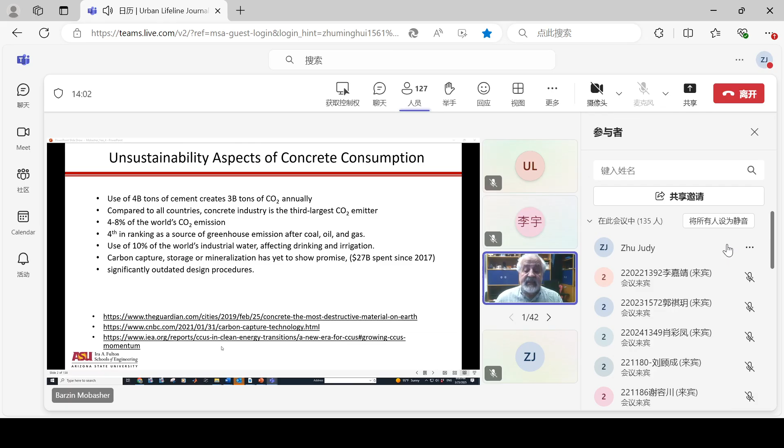So we need to look at the way we look at concrete and the way we design it. The second item I want to mention is that we are using significantly outdated design procedures. Some of these ideas presented here in these publications and news show that there is a real serious need to address that in concrete. And the question is, are we doing enough?

I believe there is a changing societal attitude toward use of concrete. Articles come out that say, for example, concrete is the most destructive material on earth. This gives us a bad rap, a bad idea, that this is not right, when everybody comes in and wants to just blast concrete as a fact that it's a problem, or the false promise of carbon capture as a climate solution, where oil companies take the carbon dioxide and pump it into the ground to get more oil out. But there is no guarantee that carbon dioxide is going to stay inside the ground.

So we need to look at our consumption. For example, China's cement use in 3 years was more than what the US used in the last 100 years. The growth of the Chinese economy, transportation, and infrastructure is really dependent on how well concrete has been used. But we really need to, and I want my colleagues there to take a lead on some of these ideas. If there is any way we can discuss these ideas, I would be grateful.

My third question is that about 60 to 75% of the concrete we use is loaded under flexure. Because its tensile strength is so low, it doesn't really carry much load. The magnitude of the load or stress that concrete carries in tension, as you all know, is quite small. So how do we develop efficient designs for concrete? Are we doing enough to develop efficient structural designs?

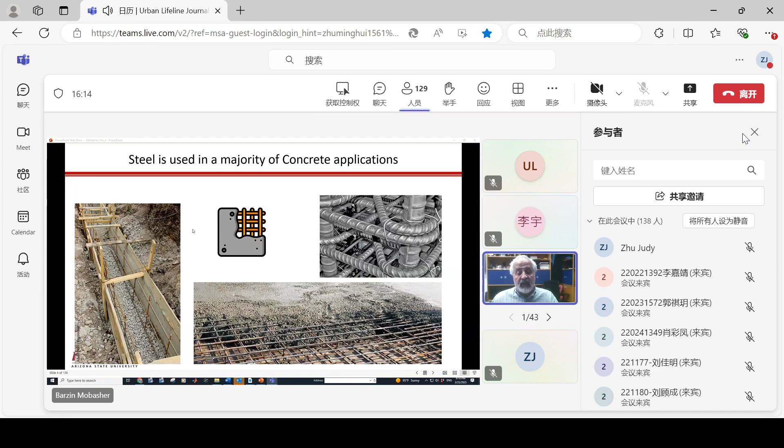Of course, we need to start looking at what I want to call a monopoly of steel, which is used as the only material for reinforcing concrete. Yes, we're using composites and everything, but the total amount of all the carbon fibers and alternatives out there is only about 100,000 tons, whereas with steel, we use about 2 billion tons throughout the world. That slide is shown here.

When you look at world production of steel in the past 70 years, basically from 1990 till today, the amount of steel that has been used has tripled. So no matter how much we recycle steel, our consumption is still much higher than our rate of recovery.

China produces 1 billion tons, half of the amount produced today. But 25% of all that, which is somewhere about 500 million tons, is only used in reinforcing concrete. So 25% of all of this number goes into concrete as reinforcement.

But we have all of the problems as far as corrosion, all of the problems as far as the labor costs and the amount of...

So if you want some conversion factors, for every cubic foot of concrete, we can convert it into SI, there is about 7.5 pounds of steel rebar that's used. So steel contributes as much carbon footprint to the concrete as the concrete itself, but nobody's talking about how are we going to find alternatives for steel.

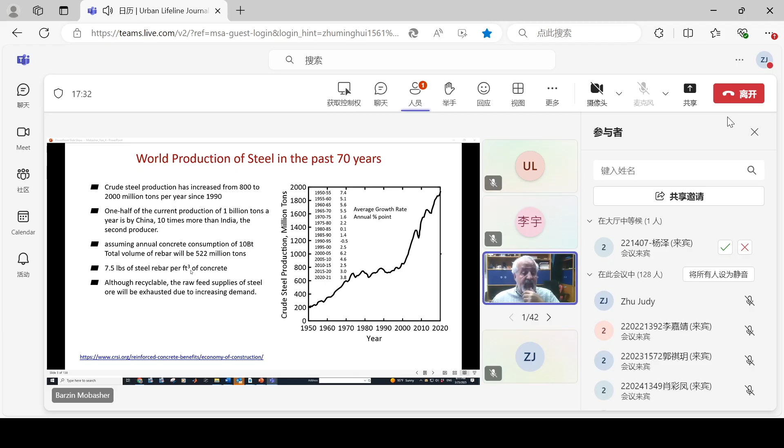And so that's basically the area of my work. So how do I reduce some of the steel that's used so much?

One of the things is the efficiency of concrete from several points of view. One is the stress to strength ratio for both tension and compression. Concrete is extremely good in compression, but it's awfully brittle in tension, which means we have a very low tensile capacity.

So we need to normalize the specific strength. We need to characterize the material property not based on its compression properties only, but also the tension properties. If we can improve the tension properties, we can definitely carry a lot more load, because tension failure is the dominant mode that is a showstopper that doesn't allow us to further use the amount of concrete.

So my argument is that we waste a lot of concrete because we allow it to crack in service, and then corrosion and everything comes.

So we need to look at specific strength per volume, and we should stop looking at compressive strength as a measure of how much CO2 per MPa we're putting out there, because we never get to reach that level of strength. So why are we putting so much more cement in order to increase the compressive strength, whereas we're ignoring the tensile strength? So what are the solutions that I have chosen throughout my career to address it?

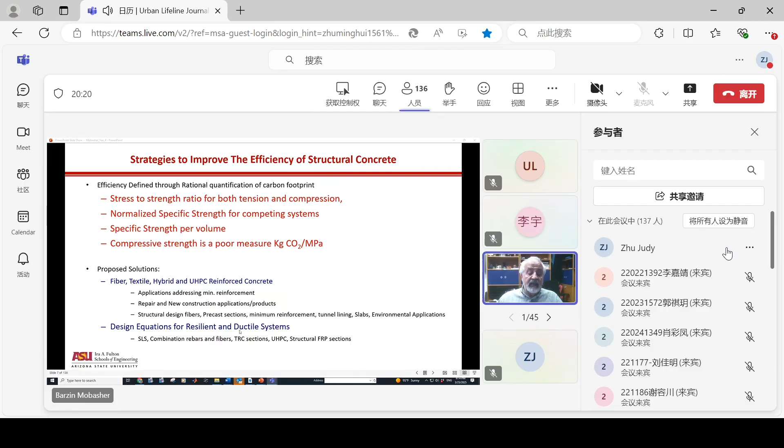The next step, which I want to get your attention to, is should we look at the way we design it? Can we develop design equations based on resilient and also ductile type systems for all of these materials?

So let's look at a little bit of a lesson in history. The bridge that you see there is basically 125 years old. It was made in France based on the fundamental principles of reinforced concrete. So the ideas have been developed for more than 120 years.

Model T cars, automobiles, were developed in 1908, and the first international flight, transatlantic flight passenger service, happened in 1939. So look at this airplane and look at the current day airplanes that we have. At the same year, 1939, that's when the design of reinforced concrete became standard.

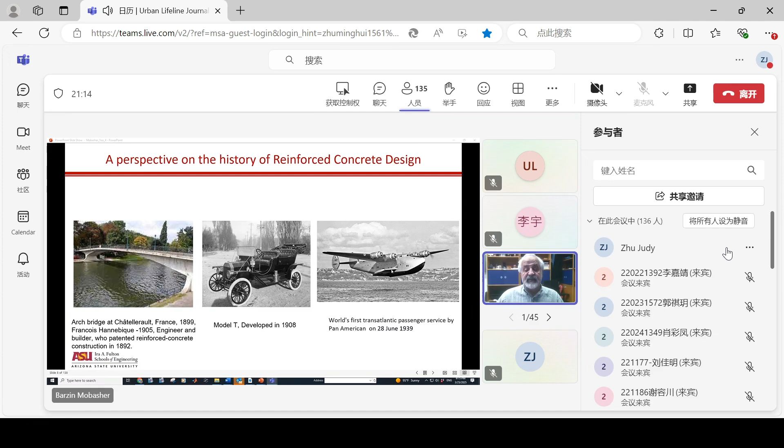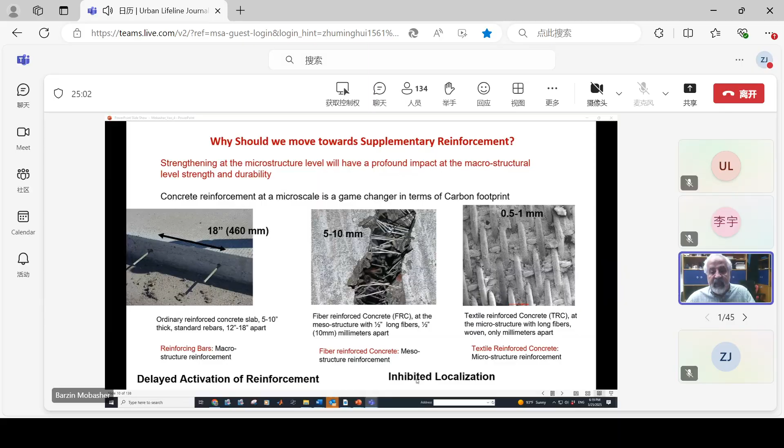But in the area of fibers and textiles, we have what we call an inhibited localization, meaning they are preventing localization from taking place, so the concrete is carrying a lot more load. I'll come back to this inhibitedness later on.

So what are the potential mechanisms that I can use to toughen the concrete? Everybody has done this, and we know it, but the question is how do we bring them into formulation? One of them is crack path tortuosity: allow the crack to go through many different paths, deflect the cracks, make it break apart and dissipate the energy, crack bridging, fiber pullout, yielding.

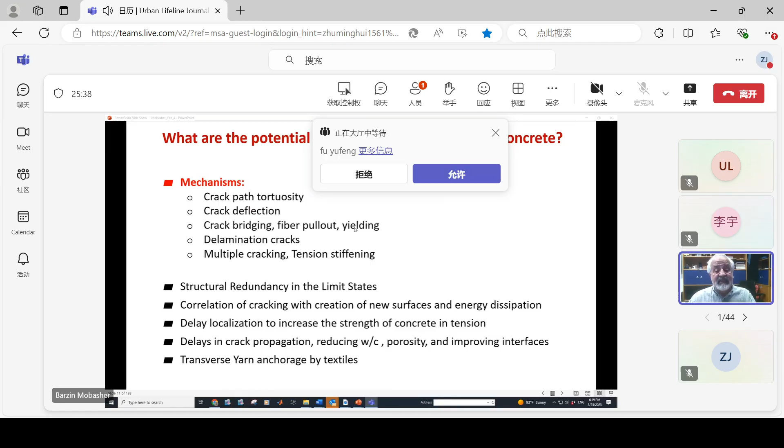All of these are negative energy—energy dissipation in the system. That's what we want. We want to spend so much energy, and that increases the toughness, meaning the energy required for growth of the crack is not available anymore. Delamination cracks are perfect. At the same time, multiple cracking, tension stiffening effects, and such all become present, and they take energy out of the system. That gives our structure redundancy.

We can go toward plastic limit states, and we can actually do correlation calculations of how much more energy is needed to create all these new surfaces, to create all of this energy dissipation. That's how we can increase the strength of concrete in tension by doing so.

Some examples: if you have a small crack before it has localized, of size 2A, if it intersects a certain number of fibers, the only way you can deliver energy to the tip of the crack is by opening of the crack. But if the fibers are bridging it, they don't allow these cracks to join each other, and it delays. Then when you go into debonding, you have to slide these debonding zones, and that dissipates energy. The sliding and opening makes it extremely difficult to deliver energy to this point where it's being dissipated.

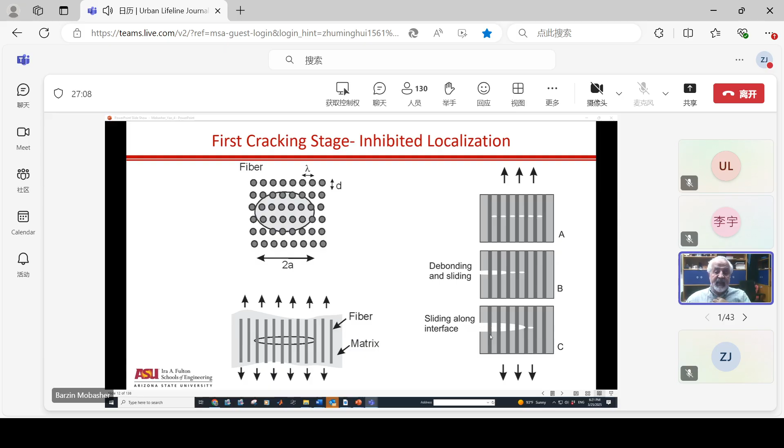So this is what I call inhibited localization. Another way we can look at it: if a microcrack grows large enough to hit a fiber, it gets diverted, goes through a delamination crack, then goes around. That delamination crack becomes a tunneling crack, which propagates up and down. This means you now have six crack tips wanting the energy. Some of the items I've written here, if you look at the slides later, you can see these are all mechanisms we can benefit from.

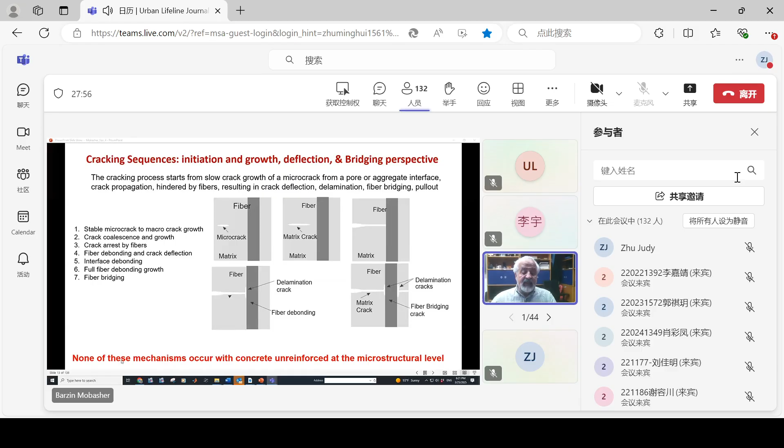This is good if you have fibers in there, if we look at the microstructure from a material science point of view. None of these mechanisms occur with concrete if it's unreinforced at the microstructural level, because for this initial microcrack to propagate, if there's no barrier along the path, it's just going to have all the energy to go through, since the surface energy is so small for the growth of the crack. It's these nonlinear terms that generate and dissipate the energy that gives us the added strength.

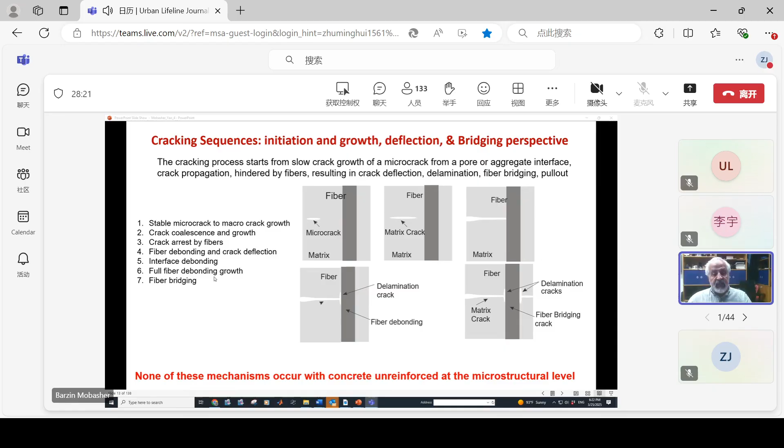So this allows us to play with a system where we make composite laminates with different orientations of continuous fibers. This is the area of textiles that I will talk about. When you look at the microstructure internally, we see all of these microcracks that have formed.

We can also try to develop a sequential system where you have a fiber pull-out mechanism. You take the energy of that, put it back into the system, and calculate how much energy is required to grow this crack. Even when it grows, you ask how many more cracks like this I can put in there. So we get these parallel cracks. These account for doubling or tripling the strength in tension.

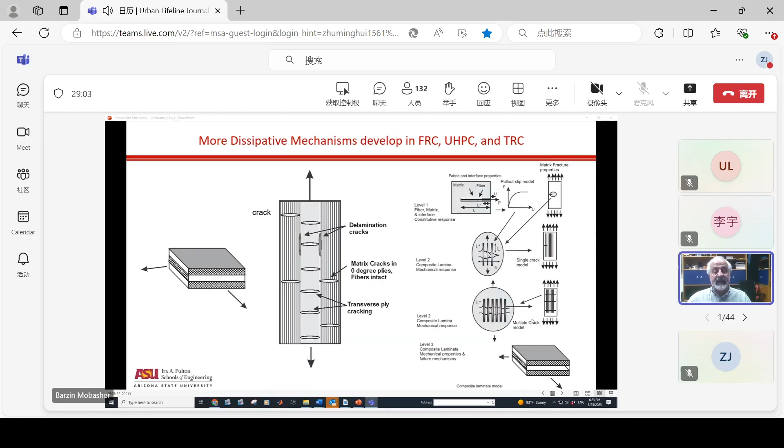If you double or triple the strength in tension, you can definitely reduce the amount of concrete needed to carry a certain amount of load. That becomes secondary, and we can calculate it.

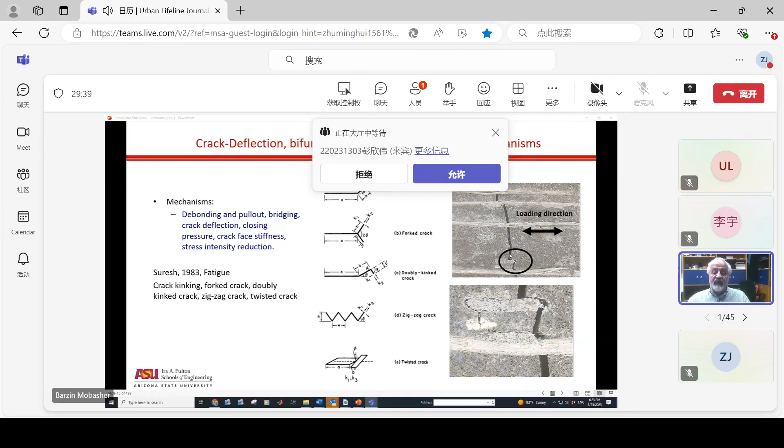Another part I showed you is how a crack gets bifurcated, gets deflected, and then travels. So this is basically all the delamination I was showing you in a picture. All of these parameters can be shown as mechanisms that form in the case of fatigue of metals, and that's how fatigue can be calculated in terms of how much damage you're allowing to take place inside the material.

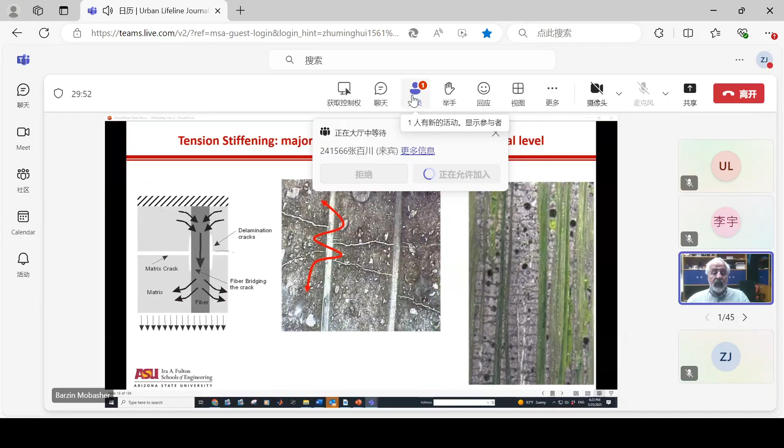You don't want a clean, fresh crack that's growing. You want to basically make it difficult. The best example of this would be continuous fibers. If you look at these microstructural pictures, you see how the load from the matrix goes as a bridge onto a fiber, travels across the crack, causes delamination, and then sheds away.

So technically speaking, any matrix you see here, although I have two sets of parallel cracks, the load jumps across here, jumps across here, jumps across here, and across here - just like the game kids play jumping over a small stream to not get wet. That's how the load is being transferred through this path, and we don't take that into account. We don't provide for this. Any way we can do this would allow us to generate this parallel cracking.

The spacing between these cracks is now on the order of 0.5 millimeters, so the crack width is kept smaller. The cracks cannot open up, so more cracks are forming, and so the bond issue becomes extremely important.

That takes us into this area of manipulating the microstructure to make textiles with AR glass, polyethylene glass, with weaving. Polymeric materials don't have a good bond system, but if we can do these geometrical changes, this shape we have, like textile manufacturing specific for our areas, they become extremely wonderful.

We don't have to actually do that. Also, if we can go to micropolypropylene type fibers, now we're increasing the surface area. So cement gets in there, it dissipates, it forms cementitious products, it changes the microstructure. So now you have an anchorage system automatically developed in our system.

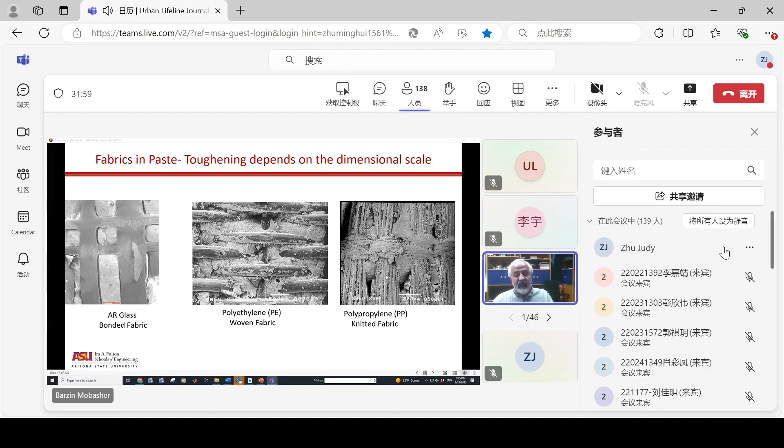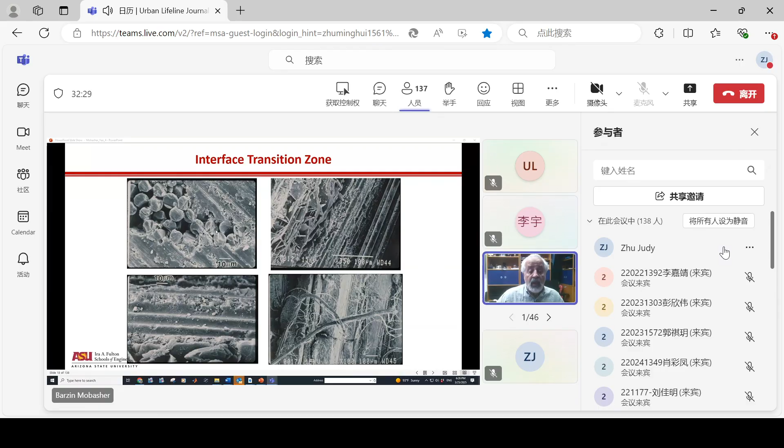This is the interface zone of a glass. If we can fill up this interface with hydration products, with calcium hydroxide, that gives us a certain degree of bond. And I want you to pay attention. We don't get full bond in these cases, and that's okay because these weak bonds give us delamination, cracking. So I don't want perfect bond actually, because perfect bond would mean that the crack has no propensity, has no direction to go up and down and in different directions.

I want damage. I want these to be directing the cracks. And that is obtained by these interlock mechanisms that we have. So we can look at polypropylene fiber or carbon fiber.

So in all of these, what I want is the pull out. I want energy dissipation. I am not really as much interested in changing the stiffness of the composite by carbon fibers. I could care less, because the cost of increasing the stiffness of the concrete is not that much important to me, because it's already stiff.

I just want to prevent the cracking. I want it, even if it cracks, to carry 30%, 50%, 60% of its tensile capacity. Let me put it another way. I want to get only 3 or 4 megapascal tensile strength out of concrete. If I can do that, I can guarantee that we can do the numbers and show that we can get billions of tons of carbon dioxide out of our environment. So that's a humanitarian thing that we have to do.

I don't want to make the strongest UHPC system. I just want to be able to activate these mechanisms. Now, what are these mechanisms? These are mechanisms of bridged cracks. And these bridge cracks can be represented by 3 parameters, and they are all related to each other.

One of them is bridging stress, how much stress is being transferred through here. Another one is crack length, how long has this crack propagated, what is the allowable crack, and finally, what is the crack opening profile. So these can be represented by sigma, U, and X, the 3 parameters. And you can define stress crack width relationship, stress distribution along the face of the crack, or crack opening as a function of the position.

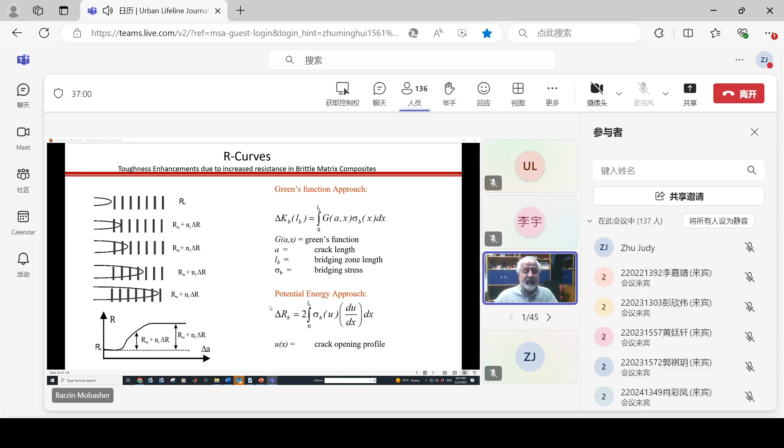And we can calculate how much toughening we get from a strain energy release rate calculation, or the R curve calculation. Both of these can be shown to be very similar, and these are methodologies used in the metals area for plasticity. We've borrowed these techniques from our colleagues, so this is not like my area. I'm just basically transmitting some of the information that I've learned throughout my years here.

So we developed a model about 35 years ago, and that basically tells me I have a condition. R curve can be thought of as a condition of stability. In other words, I have stable crack growth as shown by this green curve, and that is basically my strain energy release rate, shown as function G from fracture mechanics.

If I increase the load on the structure, the crack slowly grows by delta A until I reach a point where the slope of the two curves, G and R, are exactly the same. So initially the crack incrementally grows and stops, grows and stops. That's shown by R equals G, but the rate of resistance increases as the crack grows. So this is stable crack growth.

When I get into instability is when the slope of these two red and blue curves are equal to each other. So it's a very simple thing to do. I developed this with my colleague, Professor Chengsheng Ouyang, at Northwestern University when we were working together. And the solution that we gave was actually a solution to a differential equation.

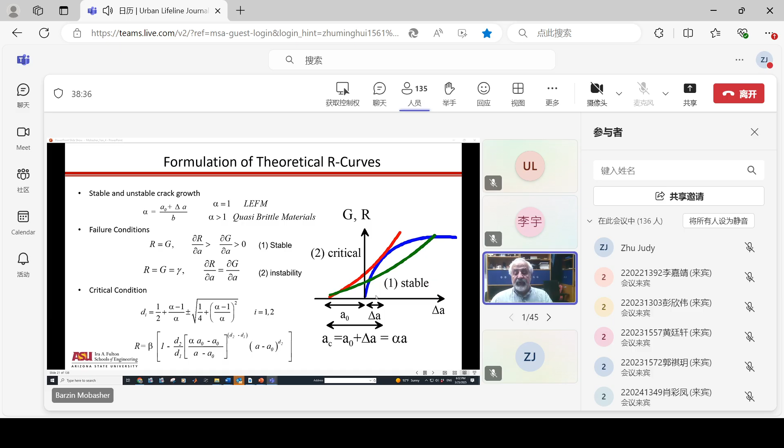The parameters are two parameters. One of them is alpha A, which is the amount of growth of the crack from the initial notch. The second parameter is the toughness of the material, which we can define as parameter beta. So with this two-parameter model, we can predict how much the crack grows and how much extra benefit we get. This method has been used to show the toughness increase when you put fibers into concrete.

And this is done by means of compliance calibration, which is a standard procedure now for measuring. So a good test for fracture measurement is this compliance calibration, where you get the R curves and you fit. And now you can say, well, this went from a level of 24 to 35 or so, and this is only using alumina microfibers. So small fibers increase the fracture toughness of the material.

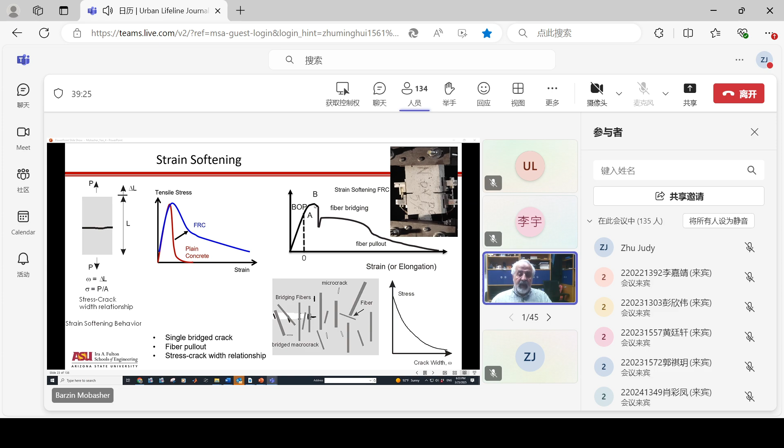Now, when we do that, we get basically the process that we call strain softening. That means that once I reach the peak, I don't have a fracture problem, I don't have a big huge sound. The FRC material basically carries more load as it's growing, and that has to do with fiber pullout because of the bridging fibers, which I mentioned to you.

And that can be represented by a stress crack width relationship, or crack width projection, and all of the parameters that I talked about before. But this basically puts us in a domain of strain softening.

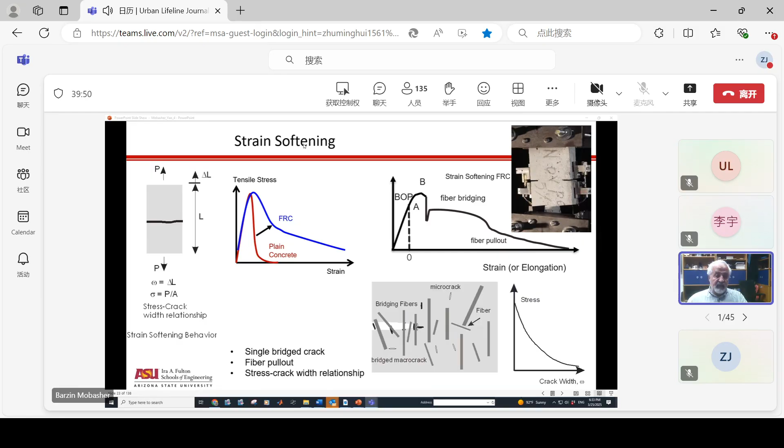If I go with a higher amount, like textiles or UHPC or such, now there is so much fiber in here that as soon as one crack forms, there is more energy available for growth of a second crack and a third crack or so. So I get this parallel microcrack system, and that would mean I go into a strain hardening response before I get into this softening.

Now I'm increasing the strength. Now I'm having a material whose tensile strength is almost twice as much, and my stress crack width relationship could be treated as a plastic type of curve. So this is actually really good, but it's costly.

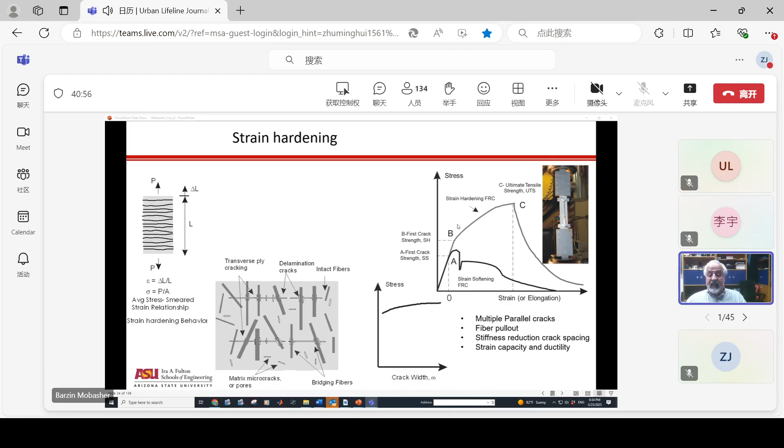Let's say the class of UHPC is defined by this model, whereas strain softening is for conventional standard material. But the criteria for strain hardening is that we must get some kind of parallel crack system. We should get fiber pullout that's controlled, and we can actually calculate the stiffness, and the stiffness reduction here can be used for our design.

And this takes us back to this whole issue that was developed by Kelly in the book he has, Strong Solids. This goes back to what we refer to as the ACK model, which was for brittle fiber, brittle matrix composites, which showed that if you have a system like that, from energy principles you can show that your stiffness decays until the continuous fibers carry the load.

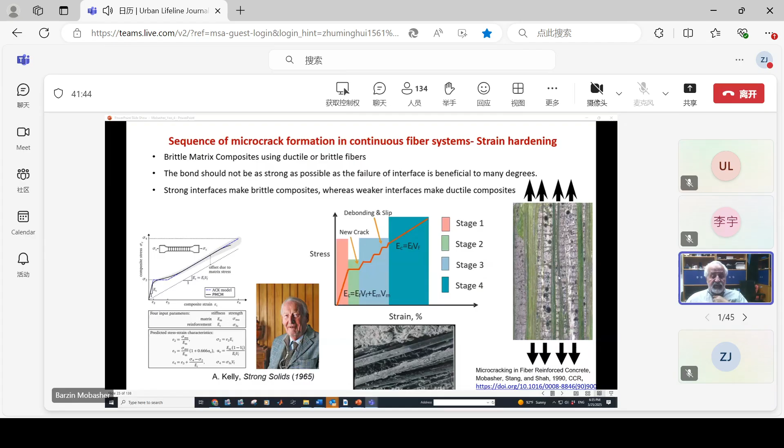We've shown that more than 30 years ago, cement-based materials can be made this way. This was done a long time ago, 1990, the paper came out 35 years ago. So we need to capitalize on this, and we need to show why these properties are this way.

For example, if we take the same material tested in tension versus tested in flexure. Here is a flexural specimen, and we put a mirror at 45 degrees so we can stand in front of the specimen and see the number of cracks that have formed. We see that we have more cracks in tension than in flexure, which has to do with the fact that the volume in flexure is much smaller.

We can use a Weibull approach to show that the representative volume in tension is much larger, so the probability of flaws is greater there. That's one way to explain it. But we have a big problem with converting data from tension to flexural tests.

And that is an important parameter for us to look at: why do our cement-based materials show a higher strength when we test them in flexure? Luckily, a lot of our failure designs, such as beams, are in the area of flexure. So that's where we look.

For example, these are some data we published a long time ago, where for the same specimen, tensile strength is about 5 megapascal, and the flexural strength is about 20 to 23. So if I'm designing something with this, I can design it with this calculation. You see that these are the same.

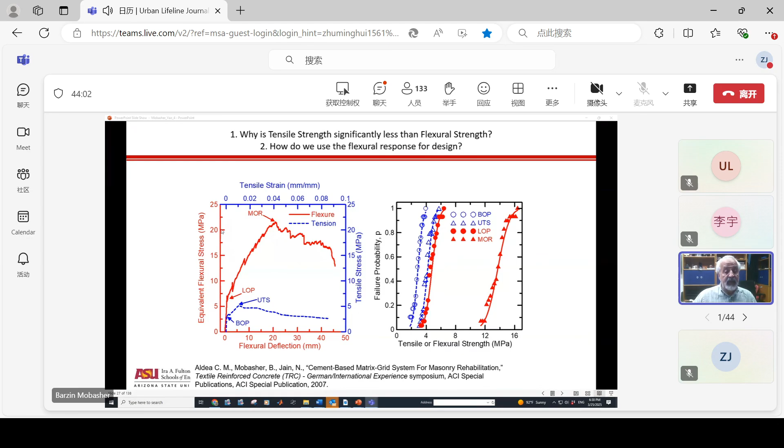So the challenge is how do I use a material that I know has a tensile strength of 5 megapascal, but design it so the apparent flexural strength is about 20. That's the key point in our work. Otherwise, we're going to have a lot of bridges that fail because somebody thought that just because they tested it in flexure and got 20 megapascal, they could apply 20 megapascal in tension also.

Another parameter we need to look at, when I talk about energy dissipation, is the manner in which we test. When we test materials, depending on whether we do closed loop control, deflection control, or load control, that affects the way the sample behaves. The best way of looking at it is to run a test that's CMOD controlled.

So we put a notch and load it, we get this blue curve. But the similar specimen, if tested under deflection control, when the load is applied under a constant deflection measured by the LVDT, we see the response suddenly drop at this point. This dashed area is the amount of energy that's stored in the specimen and given back to the test machine.

What I'm saying is that when you load a specimen in flexure, there is so much energy stored in it that the moment the crack initiates, if it doesn't have a lot of fiber, or only a very small amount, that stored energy is enough to cause fracture of the sample.

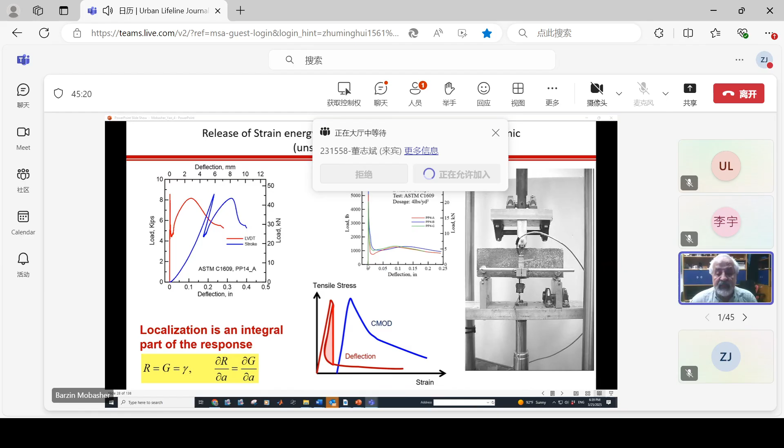So many times we run into a test like this: the sample goes up, hits a peak at a certain point, but then immediately the load drops. This is not the full response of the specimen. It's because the material is so stiff it cannot give the energy back to the test machine—it gives the energy back to the test sample instead.

That's what we refer to as snapback, meaning the load decreases as the deformation decreases, and then it starts picking up again. This is part of the problem showing that localization happens depending on how we're testing it. In other words, we just don't have enough fibers to give us that realistic strain softening effect.

So with all of this background, how do I design it? How do I design concrete? Basically, looking at it from a mechanics of materials point of view, I want to develop, using only concepts of mechanics of materials, a 1D flexural response for a composite system.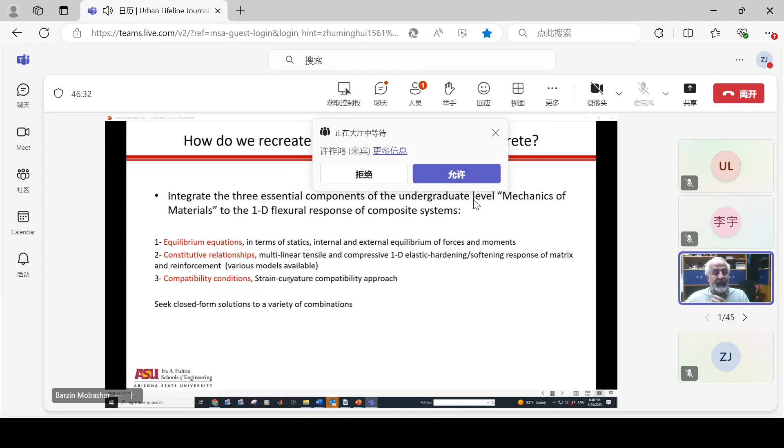If I do that, I need to respect 3 fundamental laws of mechanics. One is equilibrium equations—Newton's summation of forces equal to 0 in terms of statics, no problem. Second, constitutive relationships. Do not assume the material has a strength; it must have tensile and compressive responses in terms of stress strain. I need to use those stress strain relationships in my equilibrium equations to convert from strains to stresses. But the most important equation, often ignored, is the compatibility condition, basically plane sections remaining plane. That parameter is also important.

How do we integrate all these 3 to develop a 1D flexural response? What I want to do is solve the problems by means of closed form solutions, because if I set it up in closed form, anybody with a calculator can solve the problem. You don't even need to solve an equation, because the closed form solution gives you something you can just plug into Excel or anything like that.

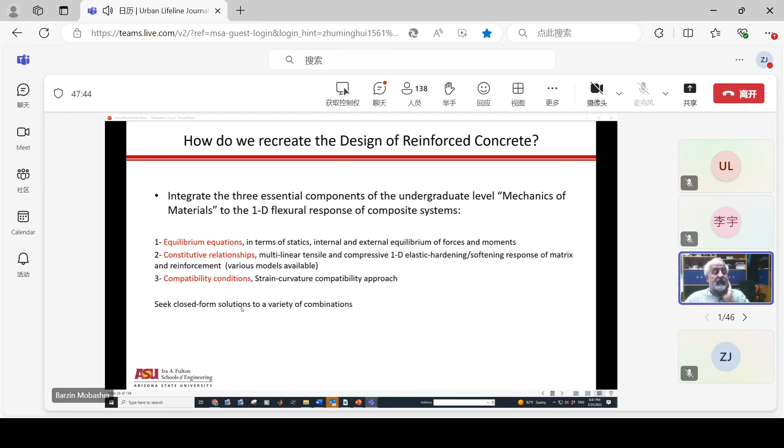So the question is, how can I get these solutions in closed form? To do that, we need to develop the stress strain diagram as a function of multilinear segments. Why multilinear? Because integrating a straight line is easy, and that's what I want to do. But I also want to use the minimum number of variables—defining two intrinsic properties: the cracking strain and the elastic modulus. The product of these two gives me the cracking strength, and everything else should be a function of it.

If I have a slope that's positive or negative, I represent it with parameter eta. If I have a constant stress in the post-peak response, I call it parameter mu—a number like 0.5 or 0.6. Eta can be 0.1, meaning only 10% of the strain is retained after cracking. Compression should also be expressed this way, so I define parameter omega as the ratio of compressive strength to tensile strength—maybe 10 or 12, meaning concrete is 10-12 times stronger in compression than tension. The same applies to steel: ES, the stiffness of steel, is n times E, or you can define parameter kappa, the strain capacity.

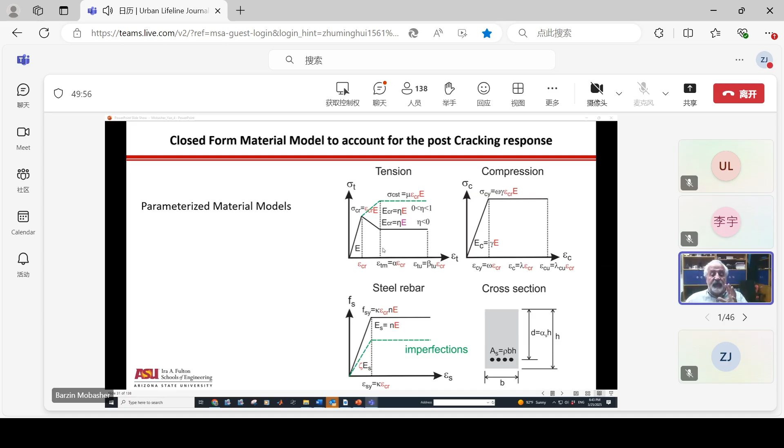Now I have very few variables that connect to each other because everything is specified. For this design, I first define my constitutive relationship—we've developed about 6 or 7 different models of this kind, each addressing a certain area: tension reinforcement, compression reinforcement, with different zones—4 pieces for tension giving 4 segments, 2 zones for compression, and 2 zones for steel. So I have a multiplication of 4 zones by 2 zones by 2 zones, a strain distribution from the strain compatibility condition, and I use the geometry of the specimen defined by B and H, plus the location of the rebar. All these are variables the designer can use, but they're all scalars—there's no dimensionality other than parameter E. Everything else is non-dimensional.

That means I can set up these equations, and now I need variables—2 variables. One is the maximum tensile strain, shown here as beta, and the other is parameter K, the neutral axis. If I know beta and K, depending on which zone beta falls into, I'd know exactly what my strain is in tension, but then I need the unknown K, which tells me what my strain distribution is.

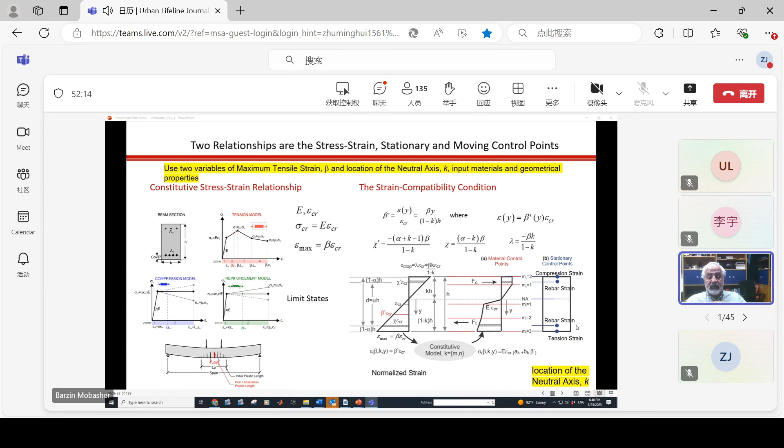Now I define also the points of interest, like, for example, compression, strain in concrete, rebar strain in compression, rebar strain in tension, and tension. So these are all points that basically can be solved. So with these 2 variables, what do you think I'm going to do?

I'm going to assume a strain, which means that beta is assumed. For that, I can get the strain distribution, stress delivery, how much stress is delivered, do the summation of the forces. Once I calculate K, I can go back in here and basically calculate the equation for moment and also the curvature. So basically, one has to go through these little triangles and rectangles and trapezoids and calculate their areas.

Which is nothing. It takes time, but if you're diligent, it's just basically very easily you can develop it. That would allow us to generate the moment curvature, which captures how one goes from one zone to the other zone. So transition from one zone to the other zone is shown by the cracking, as shown in this figure. And that's a bilinear case.

I know that these 4 numbers add up to each other and give 0, but I want to, at the end of the day, measure how much force is there in each one of these phases, because that would allow me to calculate the force efficiency factor as defined in here.

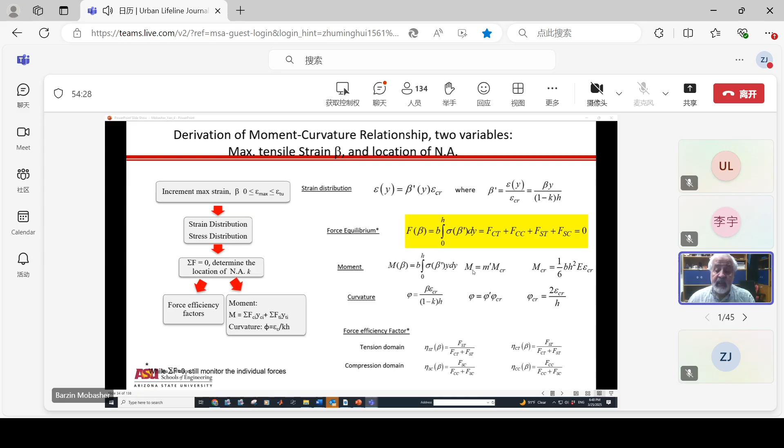Cracking moment is a function of geometry. So if I just simply change the size of this beam and just change m prime by the amount of steel content, I can easily calculate the moment curvature, and I would have the solution.

So the track that we could go, for example, for a specific case is you go through tension cracking, then you start getting steel yielding, or in tension, or concrete compression. So you can go through this path as many as out of those 4x2x2 combinations, and that would allow you to construct your steel design, your steel amount, what is the yield point, what is the transfer from one mode to the other mode.

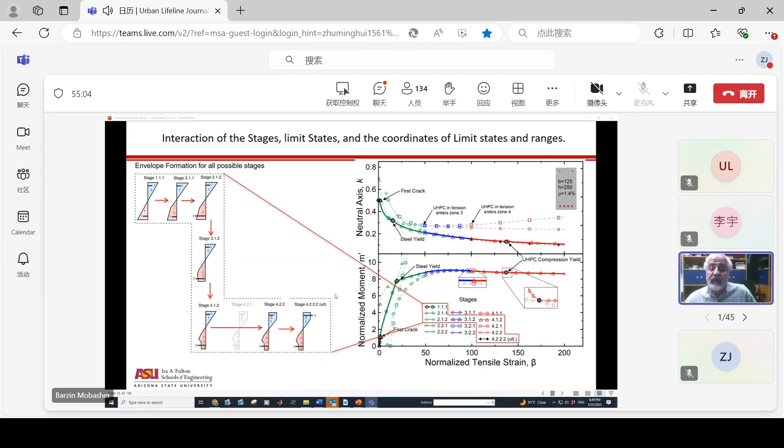Because you're always looking for the minimized moment from all of these competing mechanisms. So the dashed lines are competing mechanisms, whereas the solid line is the minimum value of the moment that the section can carry under this assumed value of these interactions.

So we have published these data, goes back to when Professor Yao was working with me. We did about 5 or 6 very popular papers that basically we showed exactly how these zones interact with each other. And these zones basically becomes our limit states.

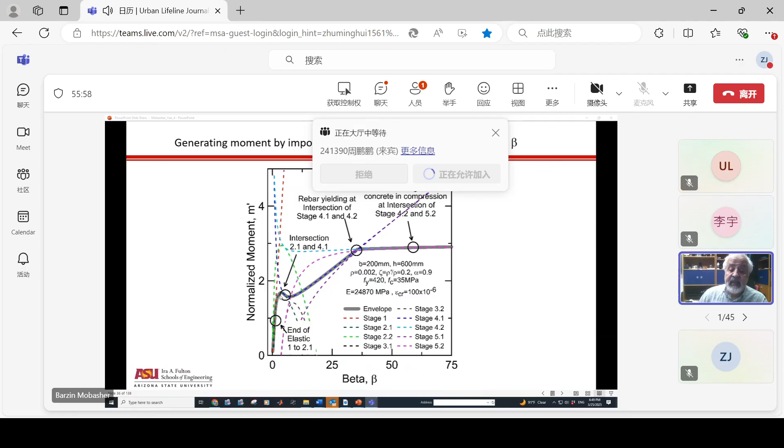So for a structural engineer doesn't need to know what stage 4.1, 4.2 is. The structural engineer needs to know that this point corresponds to the yielding of steel. This point corresponds to the initial cracking of the concrete where the load is transferred to the steel. This zone is the instability that the case curve comes down, because steel has to be loaded to carry the load. And this becomes really important in our design.

So this is basically now we can apply the model to reinforced concrete. To hybrid reinforced concrete is one where we start putting fibers in there to build up this tension zone, because we can run it with only just tension being linear elastic, and we get exactly the standard equations that we teach in our classes. Or if you go to hybrid reinforced concrete, now you have a strain hardening effect.

So for something like this, we need a quadrilinear model, meaning that there are 2 zones in the pre-peak and 2 zones in the post-peak if we want to apply it to UHPC. But the bonus that we get from this calculation is that we already know what our limit states are, and we can use those limit states.

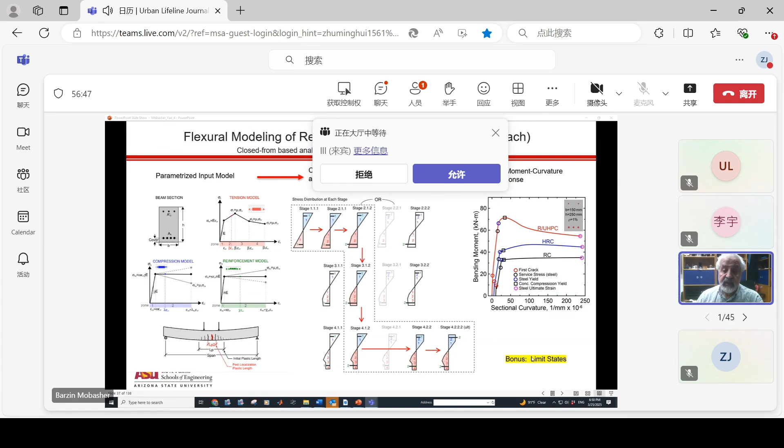We have software that have been available. They can be downloaded from ResearchGate, or ask Professor Yao for sharing it with you, or Anling Lee, who was also another postdoc who came and worked with our group, from Professor Zhu's, Deju Zhu's group.

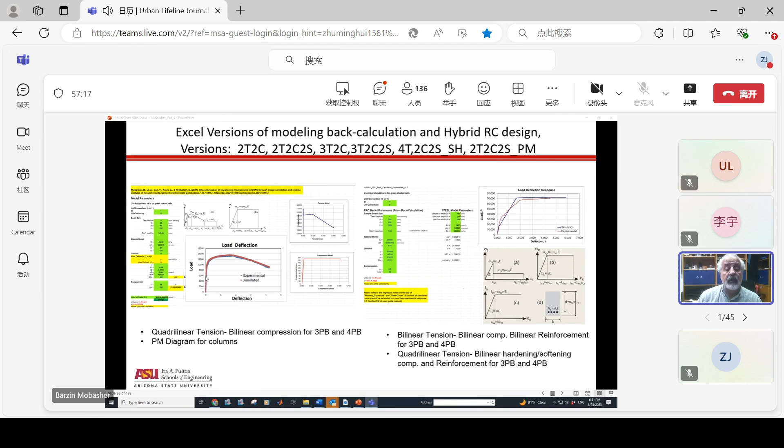And these models have been going around, and we've been trying to build them up because I think that this is a good instructional procedure to show how we can predict the load deflection results, how we can get the moment curvature to put it in.

Recently, we've worked on actually making them more user-friendly, where the parameters are input, and we can get the strain distribution and stress distribution. And if you look at this curve, you can see that it really doesn't matter how the shape of the curve is.

We get all of this concrete, which is more than 70% of the depth of the material, carrying 2 megapascal. And 2 megapascal multiplied by this area that we have far outweighs how much force your steel is carrying. So that's how we get our load deflection plot with exactly at any point along the curve.

You can choose the strain and actually find out where you're sitting on the curve. I feel that this is a much better way to teach and to educate our students that you can actually benefit from all of this concrete, that you're ignoring it.

And that's a waste. We need to calculate, and I would love to work with some of our colleagues there to look at the life cycle cost analysis of how this model can help us develop an efficiency grade based on carbon footprint, how much we're helping change the carbon footprint of concrete.

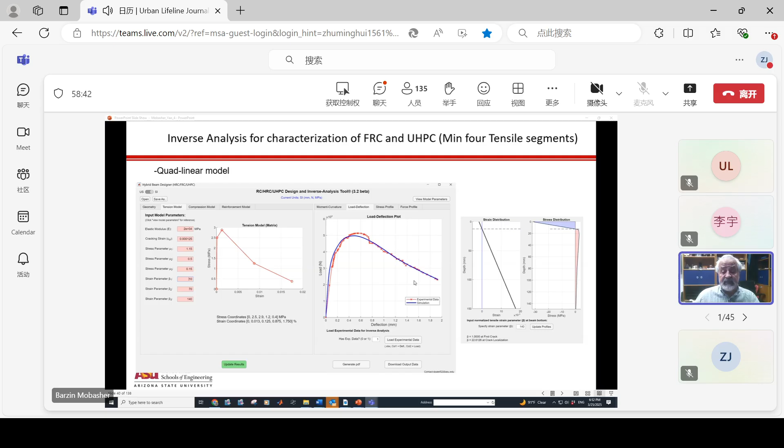And we can do it basically for softening or hardening. If you have experimental data, what you can do is fit this curve to the experimental data and actually get your tension model and compression model. And I can show that here.

So for example, this is for a UHPC member. This is out of a paper in ASCE. This hasn't been published yet, but basically what it does is that we can do the fitting of the tension, fitting of the compression, fitting of the steel, and then build up these 3 models to actually simulate the results.

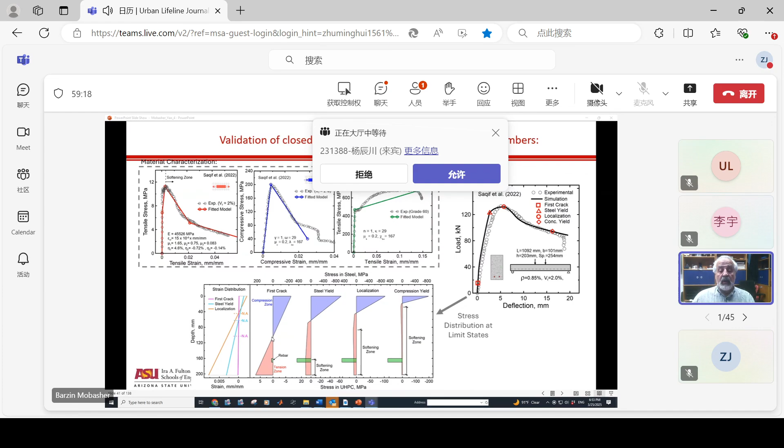Of a reinforced concrete beam that has been made with 2% fiber and a rho of 0.85%. But not only that, we can actually calculate the states of stress, show how the neutral axis is moving up and calculating. So here is a material characterization.

So we do the material testing, we measure the material properties, and now we have closed form solutions that we can apply to a whole bunch of different structures, whether it's a column, it's a beam, it's a slab, if it's a tunnel lining, and so forth.

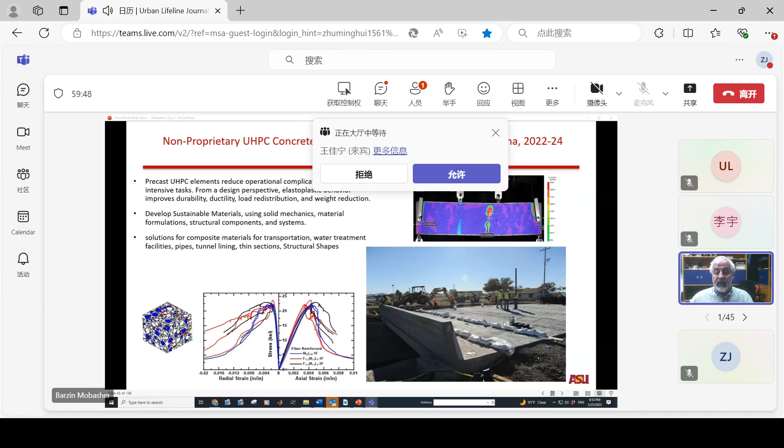So we have been looking at these tests for non-proprietary UHPC mixtures for bridge rehabilitation. What you see here is that the bridge that we replaced it in a matter of a week with precast sections, and we poured the connection pour with UHPC.

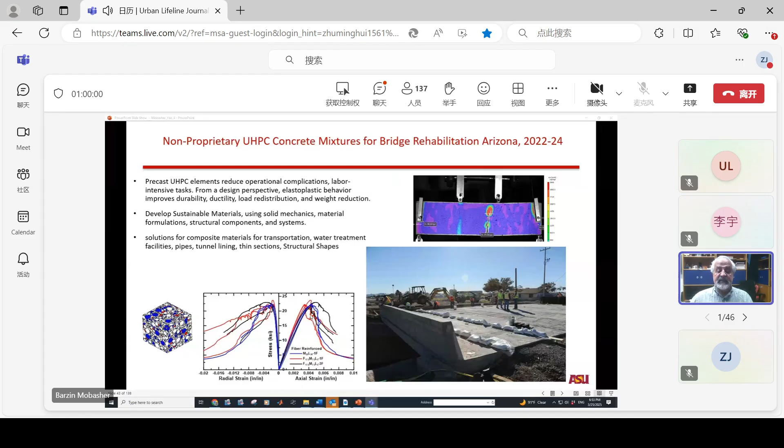So here is a test method that we did to calculate the load deflection result of the UHPC, back calculate the properties, and once we back calculate the properties, I've written the DOI for all of the papers that I'm citing here.

We can actually measure the strain softening response or strain hardening response. You only need about, with 1% fiber, you only need about 5 megapascal tensile strength and this large range of softening to be able to get this response to go there.

So with 3% fiber, this is the curve, the stress strain curve changes, but still we get much better performance.

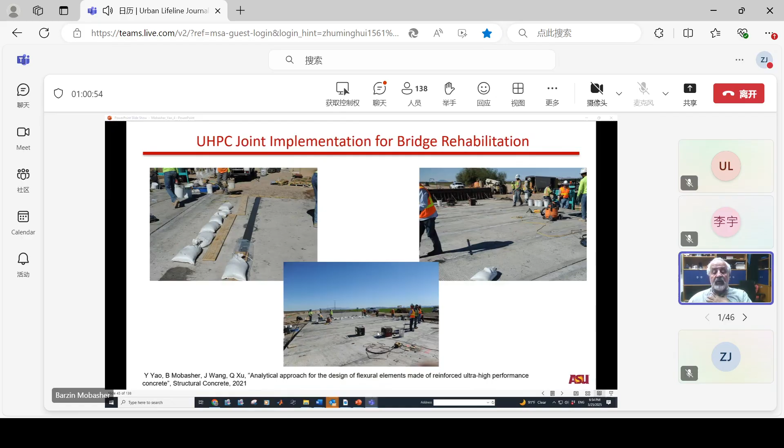So these are some pictures of the fact that you can replace a bridge in 3 days completely, it's just like wonderful, especially in some rural areas where an entire community depends on a bridge to be able to access. So these are some tests.

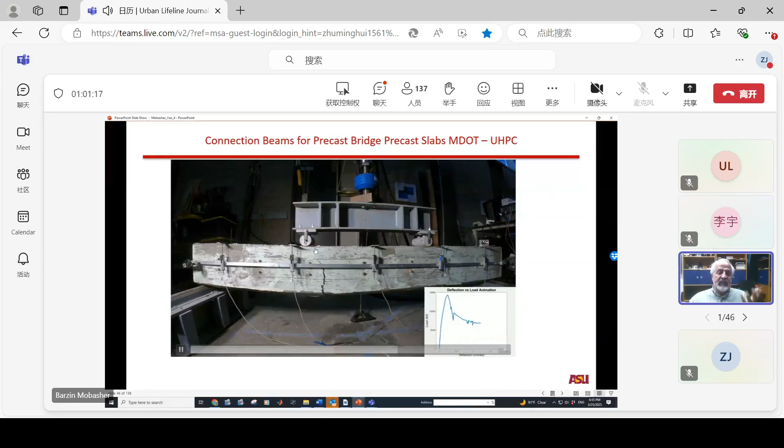And what we can show is that the amount of load that we get basically stabilizes as the crack is propagating. Of course, we're using DIC and all of the tools to be able to show that this residual capacity that we have allows us to reliably expect that the beam is still safe under the load that has been applied onto it.

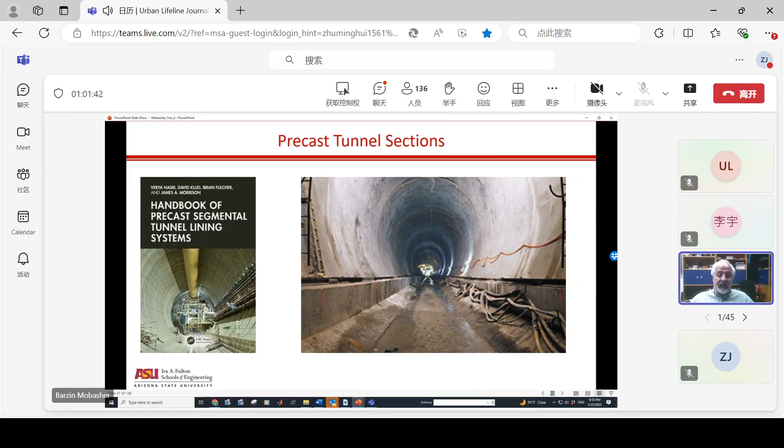And we can go on. I've been working in this area of precast tunnel sections where we're only using fiber reinforced concrete right now for all of the tunnel lining that are being used. And in our laboratory, we've built up a facility to basically test

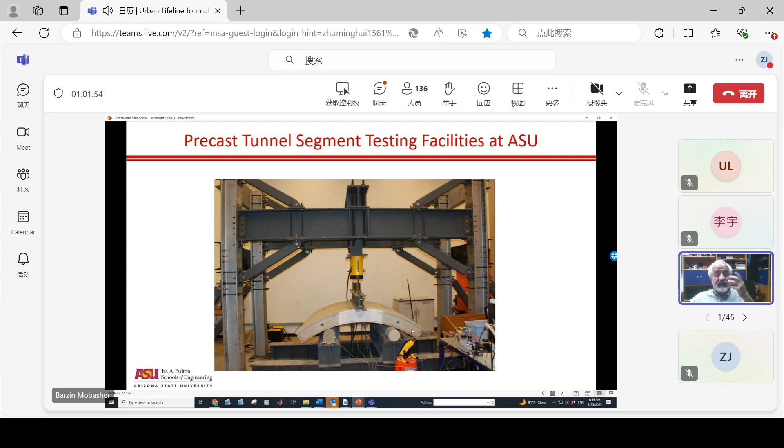the flexural capacity and also axial capacity of these tunnel linings. These are using fiber concrete, somewhere between 30 to 50 kilos per cubic meter. And the response that we get is again the same: test some standard flexural beams, measure the material property, and you can test the large scale and go from the small scale to the large scale. So this is great for design if I have enough fibers in there to be able to carry the load based on the stresses that are allowed.

This has been published. This report was published in 2016, and the method for back calculation. But then at the same time, we also are working on developing a design guide for a code for the design. Quality control becomes a problem because we have a lot of scattering in the data when we're looking at it, and that's very scary. For a person who hasn't used fiber concrete, this becomes very scary.

So here's a problem. People would say that you have to calculate the characteristic value of these, and then look at the standard deviation and reduce the data by standard deviation. And my answer is no.

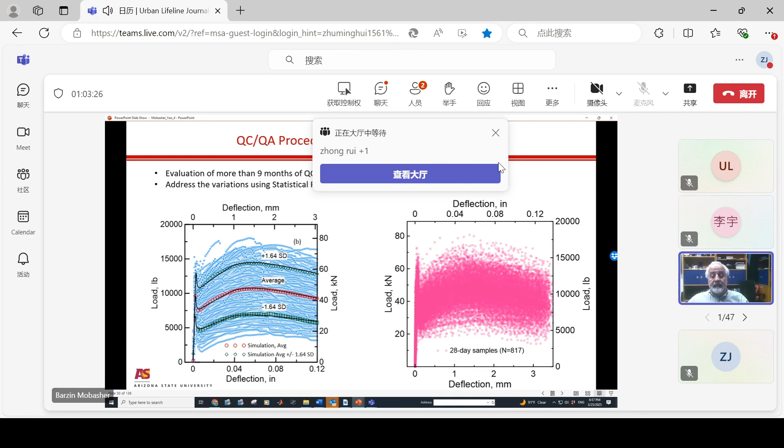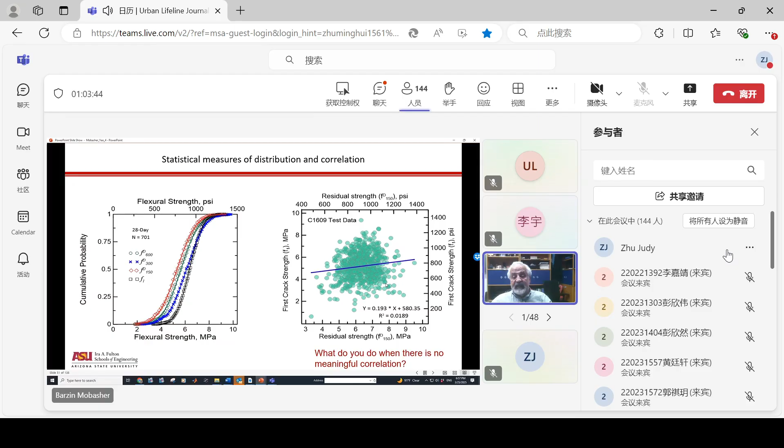This is because the fiber distribution is random. We don't need to really worry about how the results are coming, because what we need to do is look at the fact that the first crack strength, if you plot the first crack strength as a function of residual strength, it means nothing. The cracking is an instability condition, first crack. What matters is that we get this, I call it a shotgun approach, that basically is all over the place. Don't worry about this, because that's the initial cracking.

Our design should be based on taking all of this data and fitting it individually to measure the tensile stress strain diagram. Then we take this stress strain diagram and calculate the average value of it, not the standard deviation, just the average value. Because when we calculate the stress distribution, wait a minute, I got to go back to one of these previous curves that I showed and discuss it based on that curve.

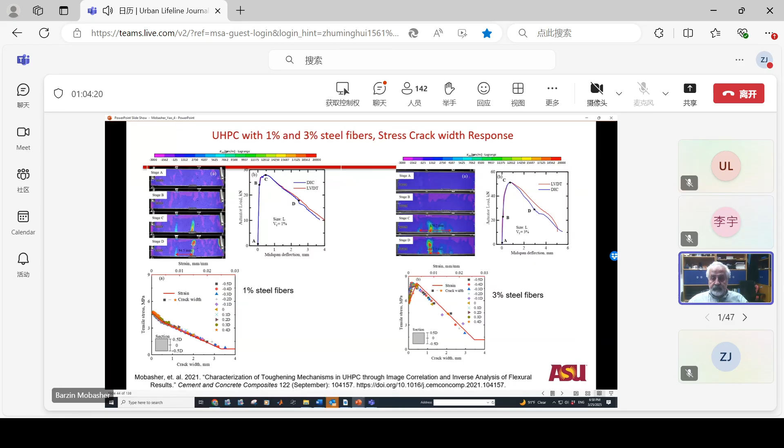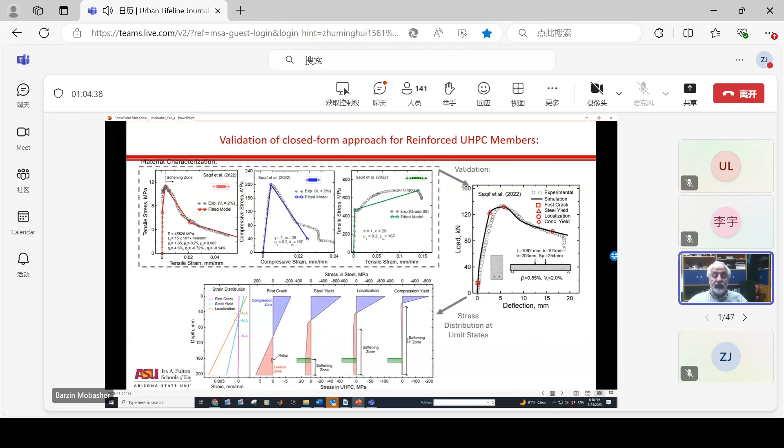When we look at the stress distribution across the section, for any strain along the length, I'm getting almost similar stress. So the variation that I have along here naturally dies out when I calculate the moment due to this. So that is the averaging process that would allow me to measure the response of the large scale specimens versus the small scale specimen.

So this is a small scale specimen, large variation. This is a large scale specimen that has a much lower variation. And it's actually this that goes into service, not the other one. So why am I penalizing this with that?

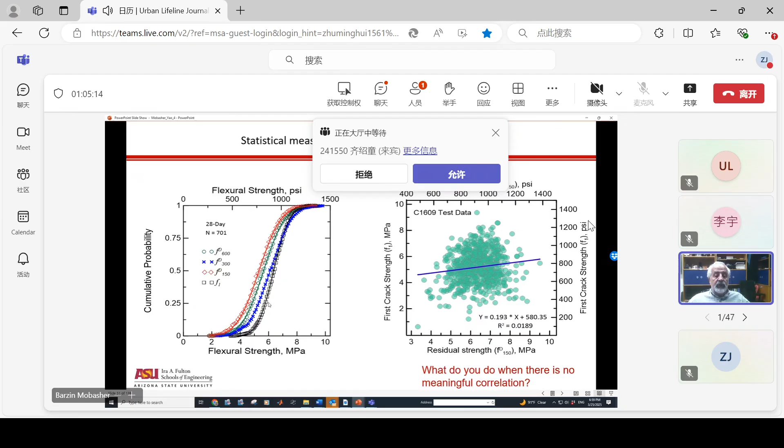And this is part of our research that's ongoing now, to show that there is nothing wrong with getting values this way. Because if you do a Monte Carlo simulation of this data, you can show that your results actually fall very much in a narrow band.

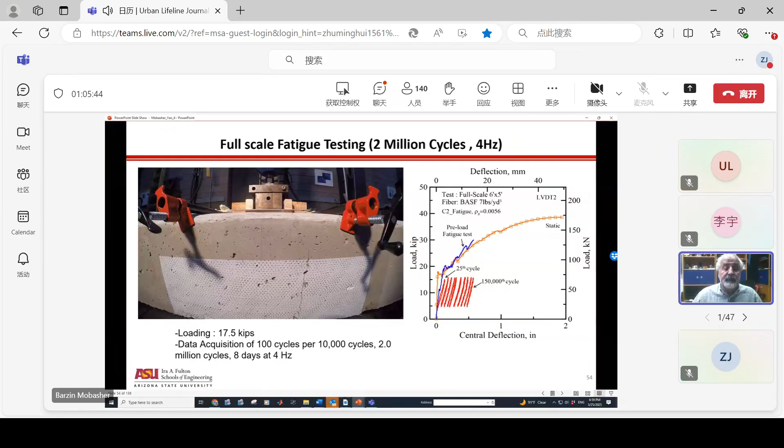Another project that we did was for our light rail system, Valley Metro, which allowed us to replace all of the rebar with steel fibers, and we subjected it to 2 million cycles of fatigue. So first you crack it and then subject it to the fatigue situation of multiple loading. This would mean a significant amount of cost savings from the point of view of potential corrosion problems, because of the DC current that exists, which creates stray current corrosion. So if I take the rebar out and put fibers in, I have significantly reduced that risk.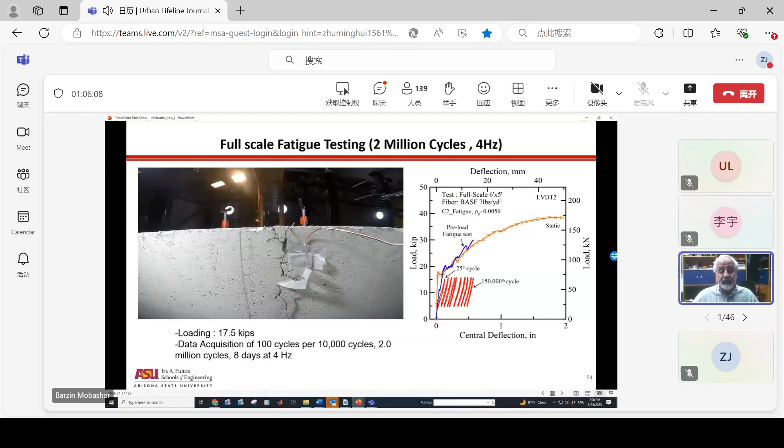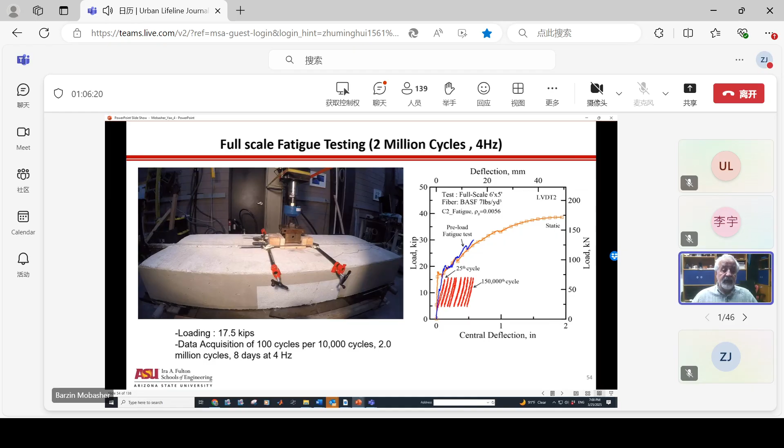And this is 3 times the load that would be expected. So we continued this test for 2 million cycles, and here you can see the crack opening as a function of the cycles of loading. Then basically they just switched over to the fiber case, and that way we got rid of the temperature and shrinkage control issue. What is interesting in this design, again, I'm running late on my presentation.

If you look at the original design, per mile, the cost was $17 million because every single rebar had to be welded.

It had to be inspected. It had to be delivered to the site. It had to be set up. So it would take approximately 231 days for a mile of track.

When we switched to fibers, we reduced the number of days required by more than half, and the cost reduced by $12 million—more than 60% cost reduction per mile of track, simply because we took out all of the rebar, number 4 and number 5, and replaced it with steel fibers 2 inches long.

This is where we get the effect. And when we look at the sustainability aspect, we can also look at some recent experiments that we analyzed. This is a tension stiffening case.

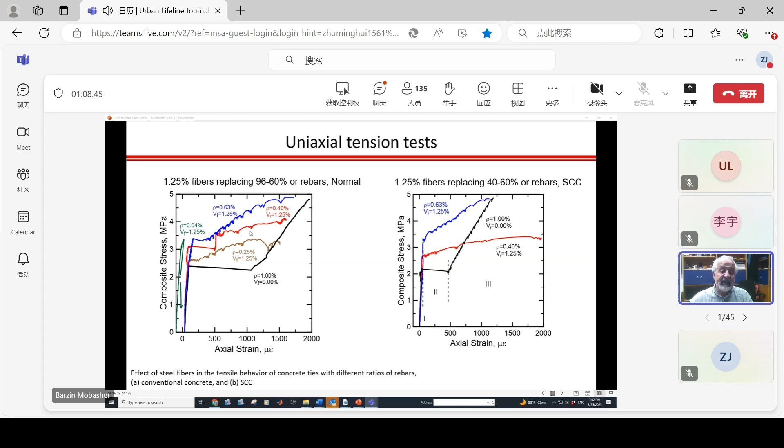Please pay attention: I'm taking 1% rebar and going down to 0.4% or 0.6%, and my stiffness still increases with the amount of fiber. So this is the synergy of the improvement that we get.

If we back-calculate how much load is carried by the matrix, we can see that when you have steel, this is the magnitude of the steel, and the matrix load is much higher. So for a large range in strain, the matrix carries a lot more load than the steel, even though the matrix has already cracked. This is another paper we just published in Construction and Building Materials, on the tension stiffening effects.

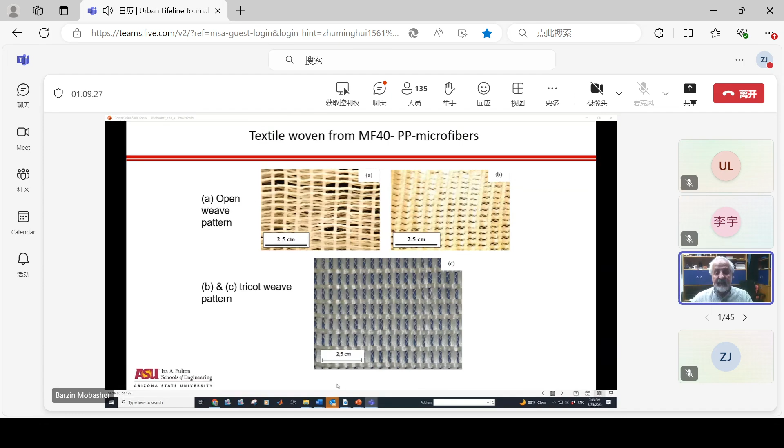Textile Reinforced Concrete is another area we have published significantly on with Dr. Yao, using the same mechanisms to achieve distributed cracking and monitor the crack width and crack spacing for different types of systems.

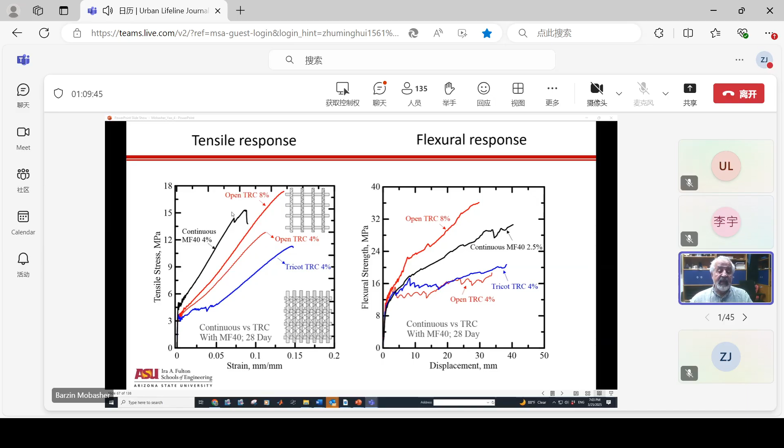Here, the TRC actually allows me to design it in tension with 15 megapascals. We have measured the crack width and how we can generate distributed cracking in our systems.

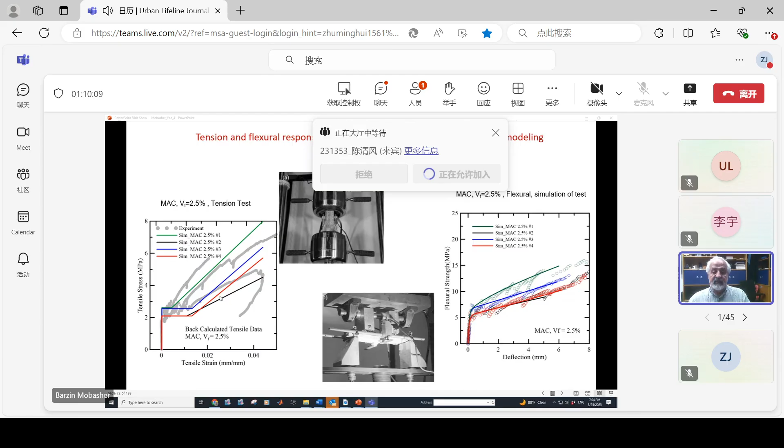Another area we've worked on is W sections, angles, channels—in all of these systems we use the model we've developed to simulate the tension and flexural response. Sandwich composites also fit into this design methodology using the flexural model, where if we use different control points, we can do sandwich, W sections, angles, and such.

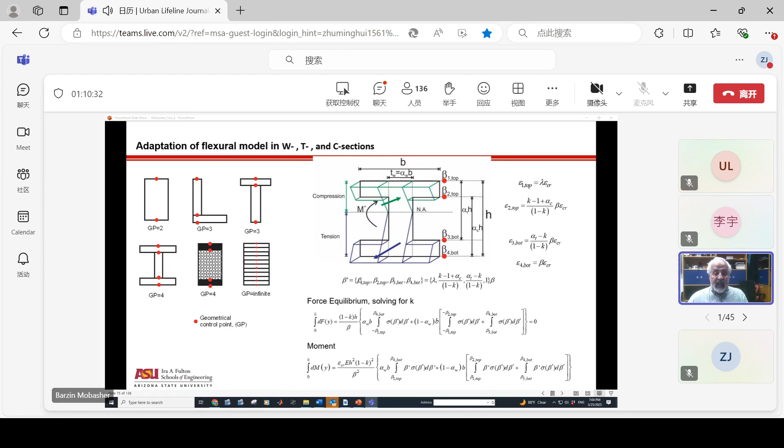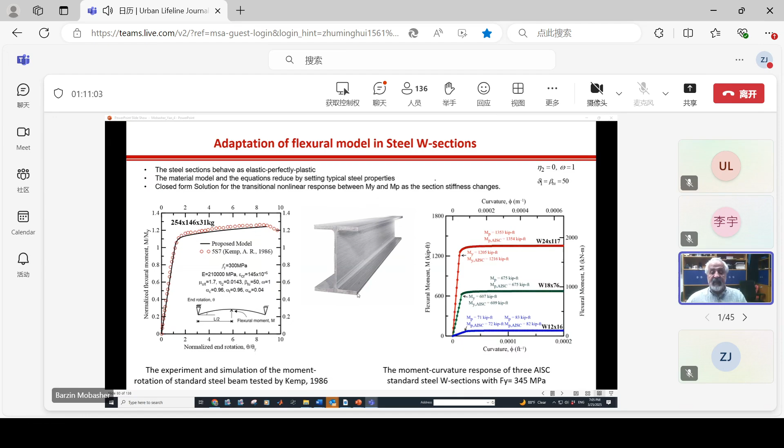These are all design equations that give us the moment-curvature relationship, which can be used in any finite element calculation or closed-form solution. We can apply the same model even to steel sections, exactly fitting the elastic-plastic yielding in steel.

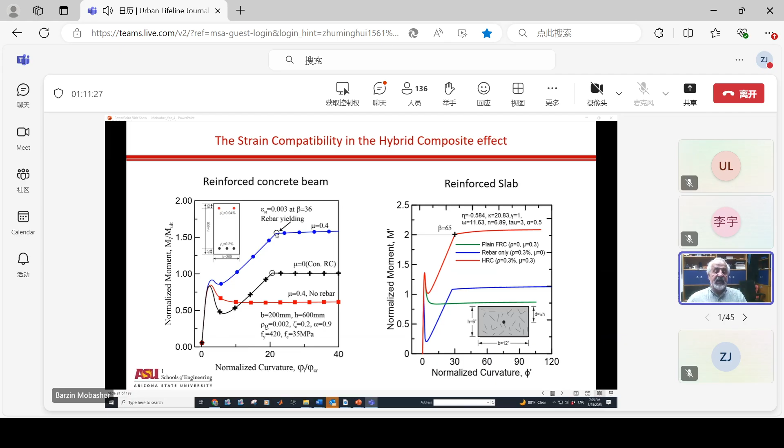Ultimately, what we get is the benefit of the fibers, shown in red, kicking in when the steel takes time to capture the load. We still need steel rebar, but adding fibers creates synergy—the load on the steel is significantly reduced and the fibers carry the load.

We've shown that with panel tests, and we can calculate it with simplified equations—a very simple equation that undergraduates can do in a spreadsheet. All the parameters give us the efficiency of the system in the section, in tension or compression, and we can see we're getting a lot more load out of the concrete.

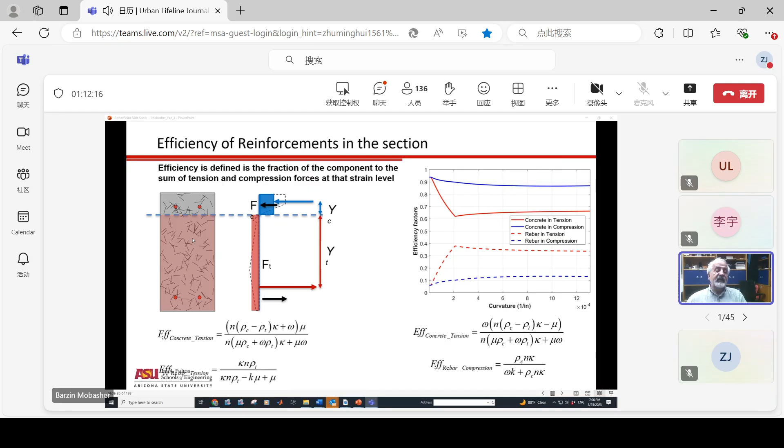This is actually a drawing to scale of concrete with the tension force compared to the steel rebar. For 100 years, we've only depended on the rebar. I'm asking you to consider that we also take advantage of this area of concrete we're putting in and calculate this efficiency.

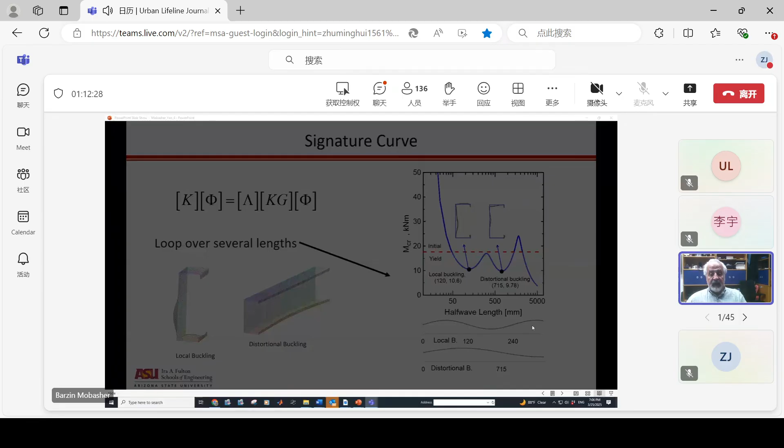All of these equations are in closed form, meaning for any section we can calculate the properties, and they have been validated. I should skip some of the work about compression.

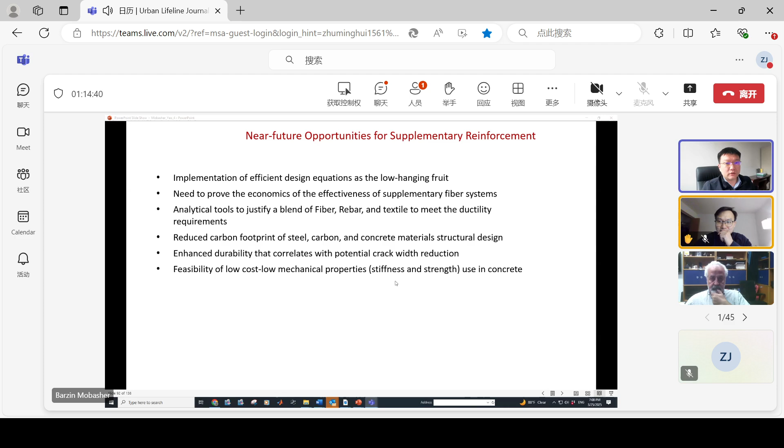See it, or should I stop sharing so you can take over? I'm not sure how this works. Okay, yeah, I can hear you. I think you can speak. Why don't you, if you can allow Mr. Zhang to unmute him, then he can ask his question. There is only one person right now asking, right? Can you do that or not? No, I don't have that option. Do you see the screen, Rui Zhang? Yeah, I see him, but you have to click on his microphone. No, nothing happens. Oh, let me stop sharing. Maybe it would be, let me see. There is a chat, you should open your microphone on your side. Pardon me? I'm talking to Dr. Zhong. You can do that yourself. Yeah, now you can talk, we hear you now. Okay, let me try.